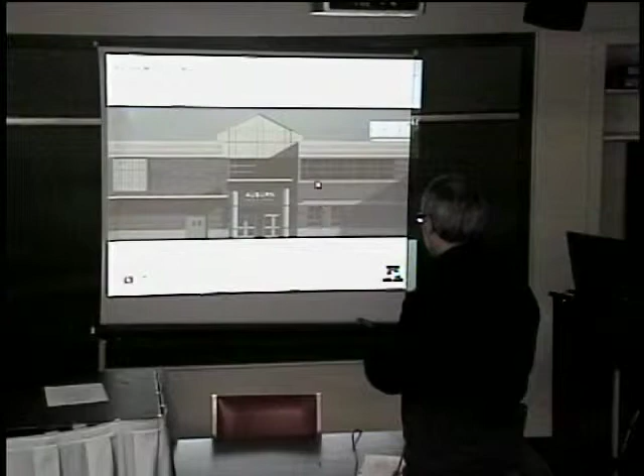The columns at the entrance will be precast concrete. The window lintels will be precast concrete, and the sills as well. And there's also some banding that runs around the building. So that's what we're looking at for the precast.

We're looking at a red brick. If you look at it, you can see it's got some flashes to it, so it's not just one color. It's an extruded brick, a Glen-Gery product, but again there are other manufacturers—we can't just specify that one, but this is our basis of design.

So that's your basic field brick. You can see here there's some darker lines that run around and pick up on the window mullions and other features. That's an accent brick, and it's an Endicott brick. It's got a nice finish—smooth, with a little bit of flash to it, so it sets off nicely with this. And then a colored mortar.

At the entrance, at each entrance canopy, we've got a band that runs across it and sets off the letters of the building, and that would be an aluminum composite material. This is the color we've selected, so we can actually put this color into the specifications, and there are other manufacturers who can match that color. So again, that's our basis of design.

We're looking at individual letters on the front, light colored, that will set off well against the blue background. You can also see we've got some metal paneling up at the top here at the entrance, and then running around the building there's a profiled panel. This isn't the exact panel, but it's similar. The panel we're using has this same depth and in-and-out profile, but it's also got a flat feature too. So instead of being all profiled like that, it's a profile and then flat, and that runs around the top part of the building and ties in with the roof fascia.

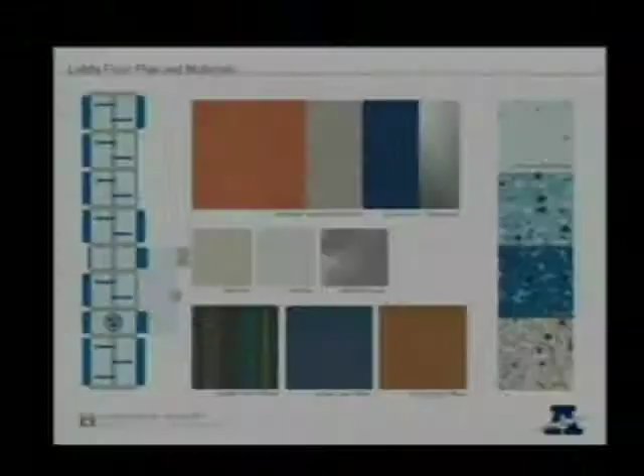At the interior of the building, we've shown you some of the lobby features, and this slide really represents the floor patterns and some of the materials.

On the left, we're proposing a pattern with Terrazzo floor tile, and that's this product you see here - different samples of Terrazzo. It comes in tile form, 12 by 12, 24 by 24, different sizes. It installs just like ceramic tile with Portland thin set mortar and has grouted joints, but it's much harder than ceramic tile and will serve very well. As you can see in the existing middle school where you have Terrazzo floors, those have lasted very well over the years.

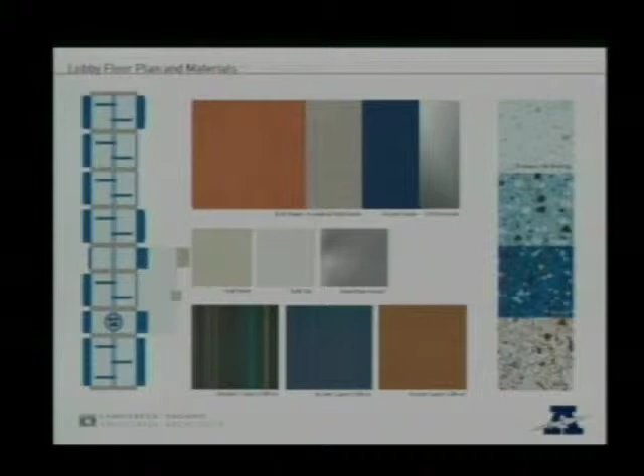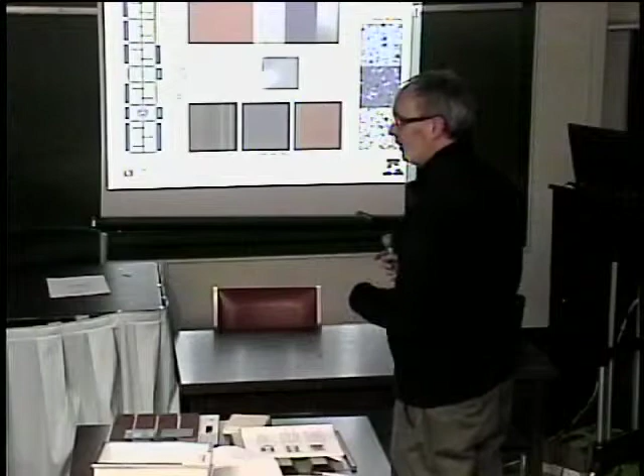We're proposing a pattern here with different colors. It ties in with the pilasters in the lobby, which I'll show you in a minute in the rendering. We've got a few different colors going, a feature down the middle, and then at the bridge, right underneath it, we'll have a water jet logo of your Auburn Rockets. That'll be right at the intersection with the corridor that goes into the classroom wing.

At the entries, at the vestibule entries, we're using a walk-off mat. This is a modular carpet tile - I think I've shown you this before - and that will also pick up on that pattern. We're actually carrying it slightly into the first bay at each end of this pattern here. So instead of being Terrazzo at this location like in this earlier version, that'll actually be this walk-off material, so that you won't need to bring in separate mats and deal with those.

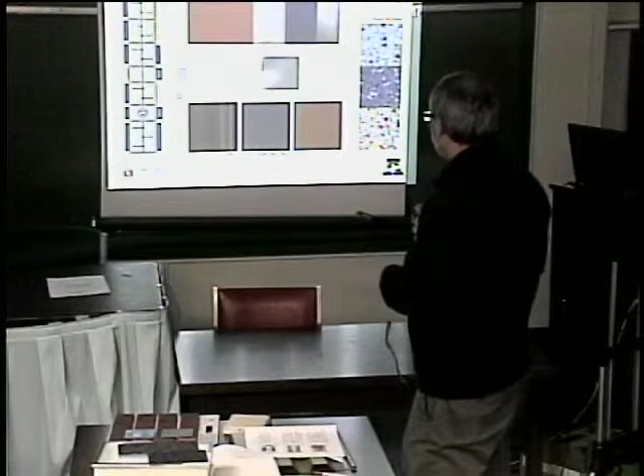We've also got some other materials here - wall panels, some acoustic materials on the walls, and the Terrazzo. These are the colors that we're looking at in general terms on the right. For the offices, we're showing some carpet that's still a work in process, so we haven't made any final decision on that yet.

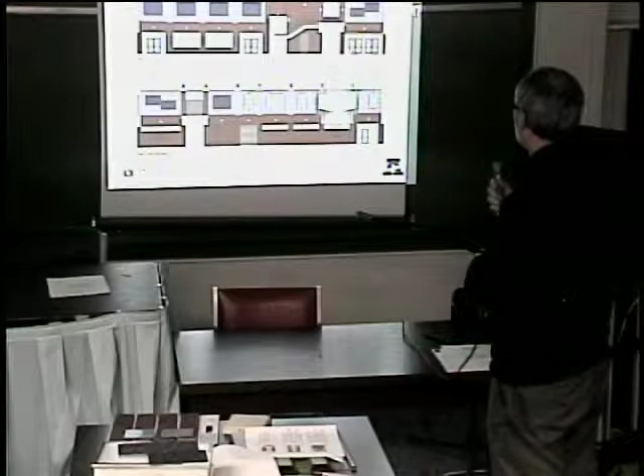You're looking at the gym here - this is the gym side, so both these doors are entrances into the gymnasium. They'll all have tempered glass all throughout. We've got two large display cases here, and the stair that leads up to the bridge and then across to the classroom wing, and the entry into the classroom system here. So we're using a plastic laminate paneling system, and that'll be broken up with reveals.

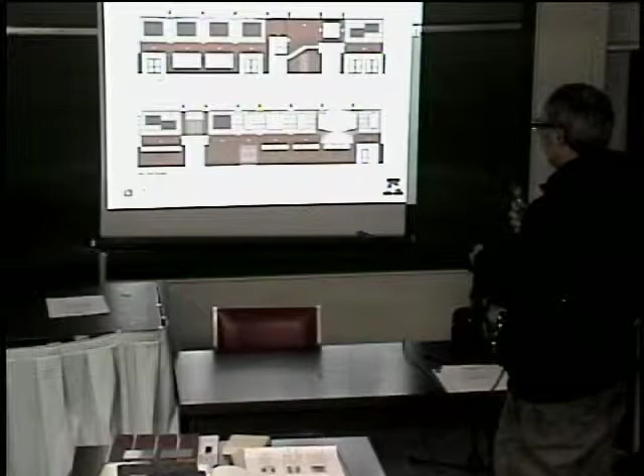Up above we have acoustical wall material, something like this. It's held in place with Z-clips and mounting clips. We're looking at a couple different materials for that - the fabric, an accent material, and then kind of a neutral material. And up above, again, we have the fiberglass translucent material for the skylight.

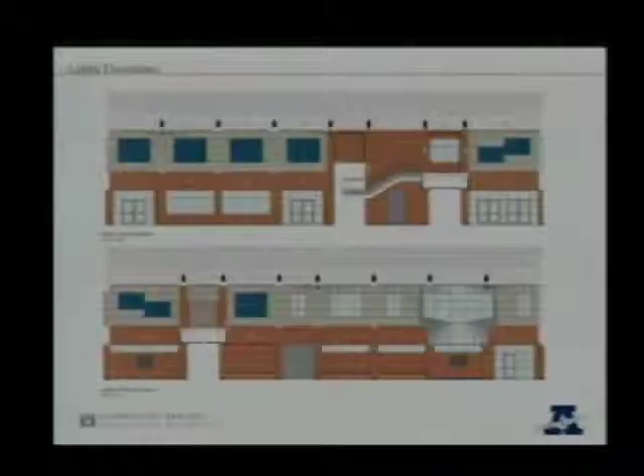We're using two different laminate panels. On this side you see the kind of wood tone color, and on the other side, where we have this rounded media center bay that projects out, that's more of a metallic finish plastic laminate paneling, and that will also be used on the sides of the bridge and around the stairs as it goes down to the first floor. So that'll kind of set those off.

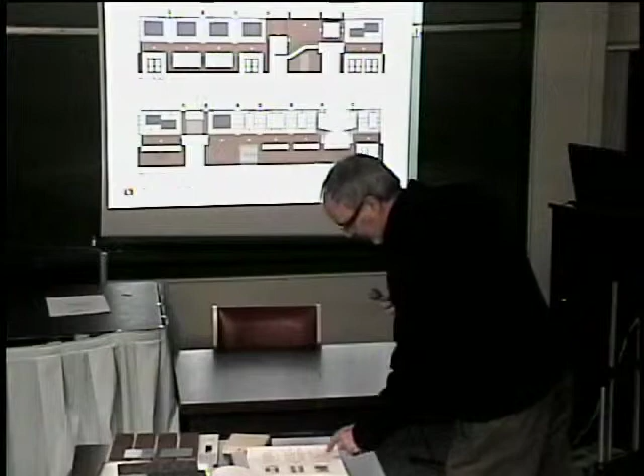Also on this elevation, you can see this opening, which is a coiling grill - it's like an open lattice grill, and behind that is a school store. That will be more or less a display area. It'll have some display slat wall on the wall, so they can display clothes or articles for sale.

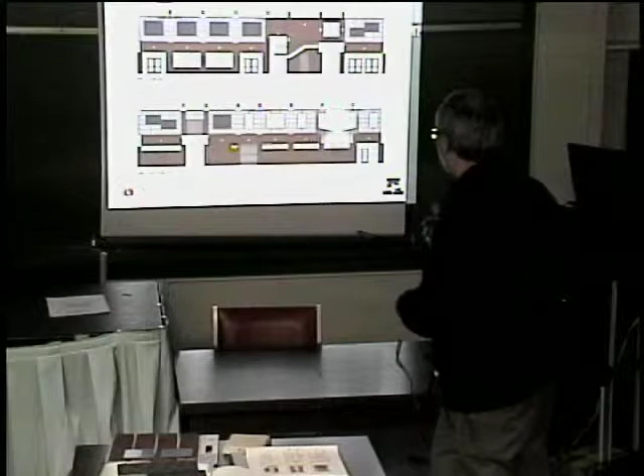You can also see there's some high windows along here, which are into offices and also into the media center up above. Just note that although they're windows, they're up above the door head height, so students walking by can't actually see into those.

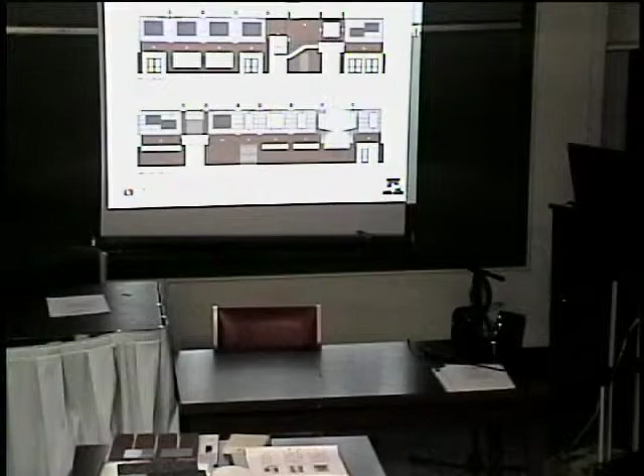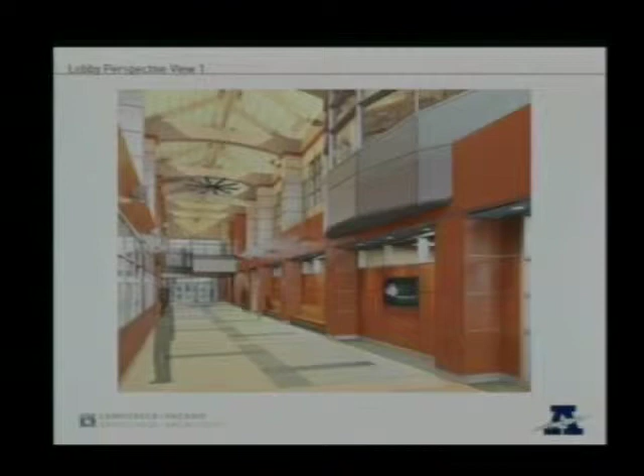And this is a view of the lobby. Again, this is the view from the main entry, and you can see the media center bay projecting out here, and you can see these crossbars. We are proposing a stratification fan here so that it moves warm air down in the wintertime. We've got uplights on top of these, and also in various places along the upper edge and this lower band here.

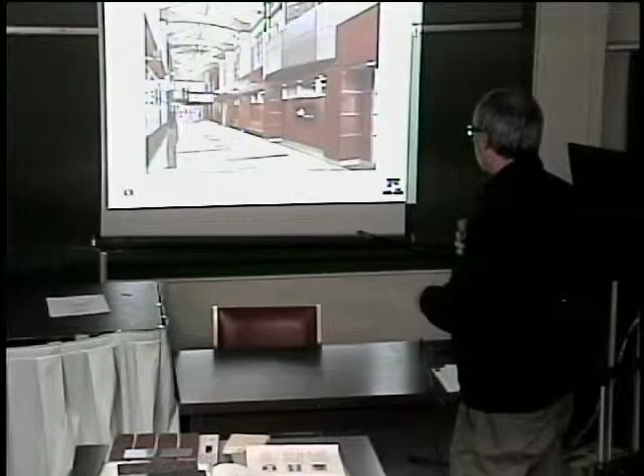And looking down, you're looking toward the multi-use field entrance here, and this would be the stair up to the bridge and across. On the left, the display cases.

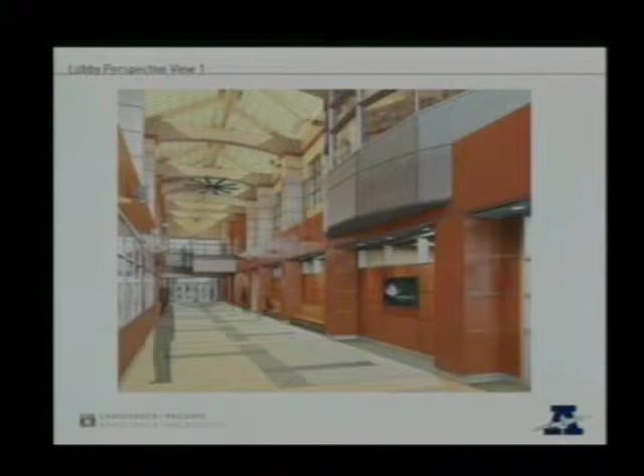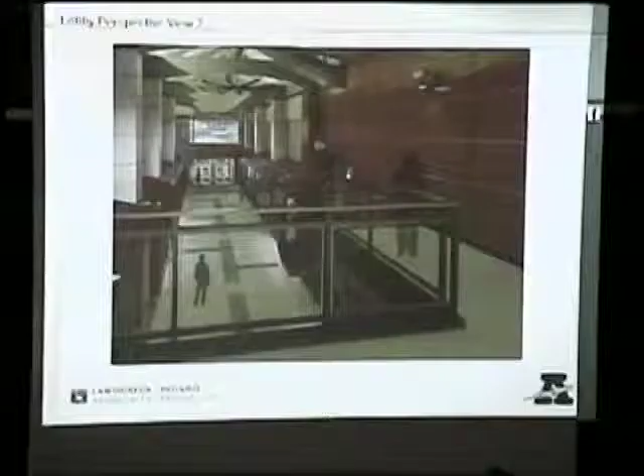From this view, looking down into the lobby from the stair. This stair is treated a little different than the others.

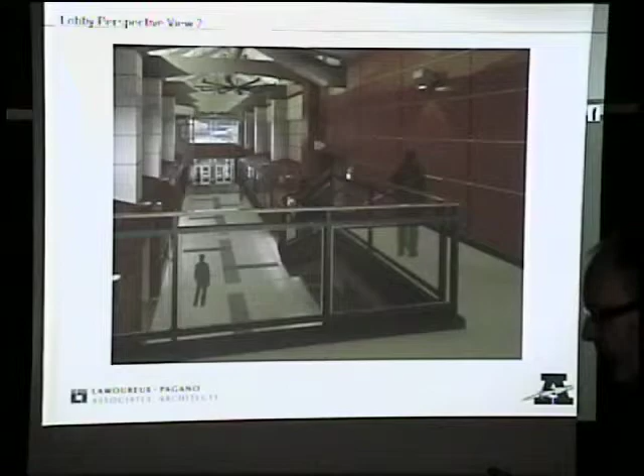We brought some samples of what we're proposing. We're actually proposing stainless steel. This is aluminum, but the size, shape, and format is similar. These are the post brackets.

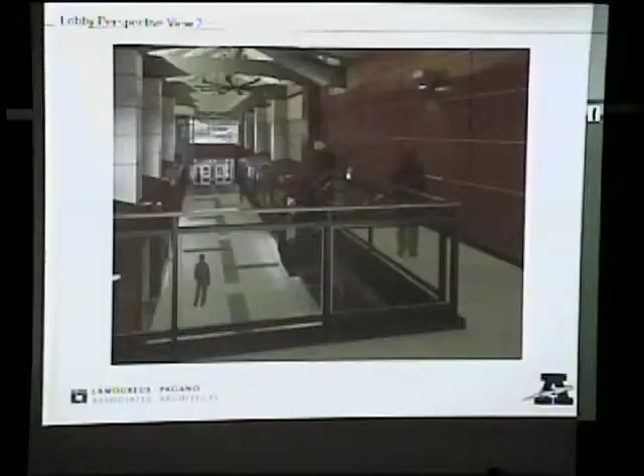The handrails will all be welded and ground smooth. Along the top of the guardrail, which usually takes a beating, we're proposing a stainless cap along that guardrail, so that will protect it.

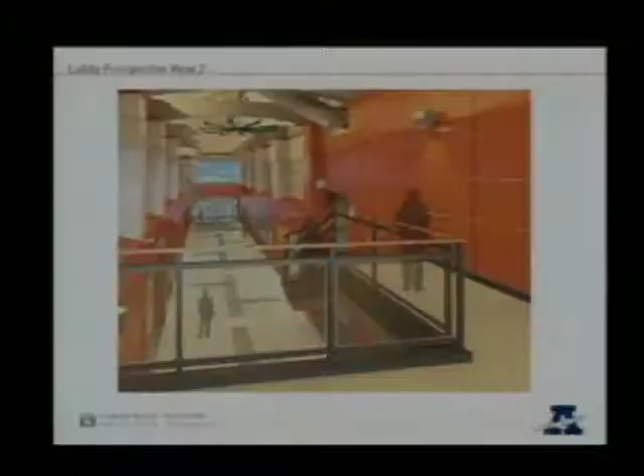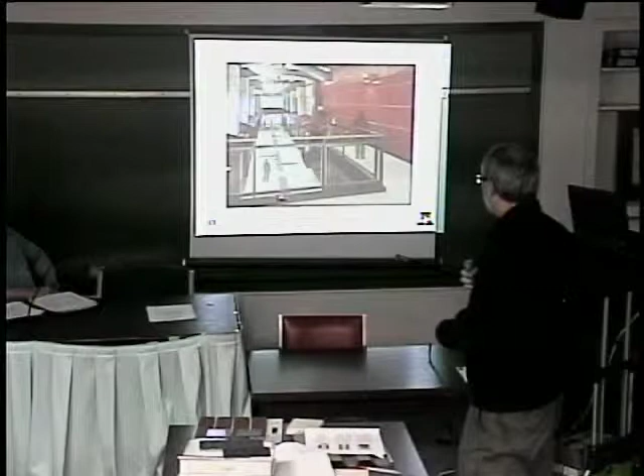At this one stair, we're using a stainless steel mesh that can curve in one direction, so as it goes around this corner of the landing, it curves smoothly around. This will be held in place in floating frames within the guardrails.

Moving along into the gymnasium.

Again, we're proposing a wood floor. This is an anchored channel floor, so it'll be held down and fastened down, but it will have resiliency. There'll be resilient pads, so it won't be a hard floor.

We have wall pads on the ends and the sides. The bleachers will be plastic seat bleachers, and those will be motorized. All of the equipment will be motorized.

There'll be a divider in the center of the room that goes up and down via wireless transmitter. Also, all of the basketball hoops can be operated with that same approach.

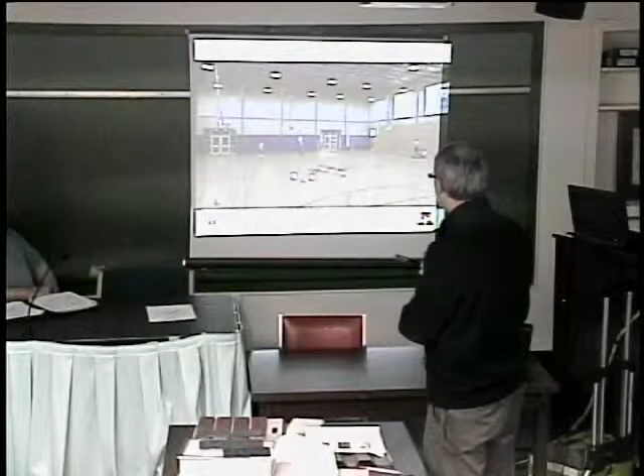We're proposing again the same Auburn Rockets logo painted in at center court, and at the ends, you can't see it here, but it will spell out Auburn Rockets with about a 2-foot wide solid band of blue at each end.

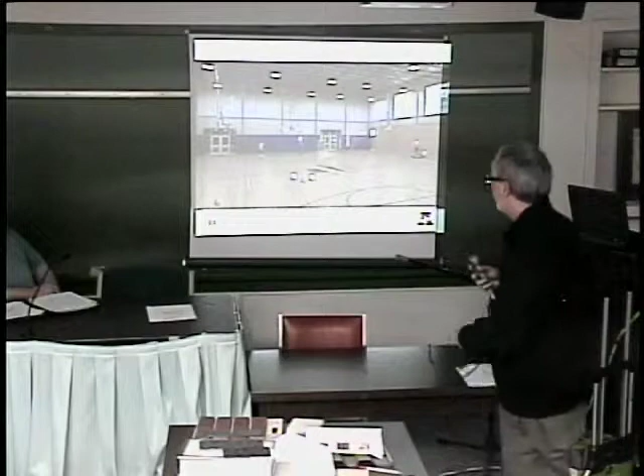Up above, the structure is exposed, the ductwork, and that'll all be painted out. We have an acoustical steel deck up there—it's perforated, it's got insulation in it, and it helps reduce the reverberation in this space, which, with all the hard surfaces, can be a pretty loud space.

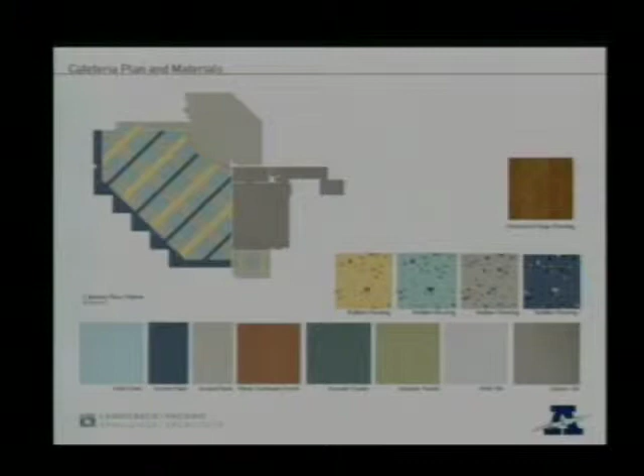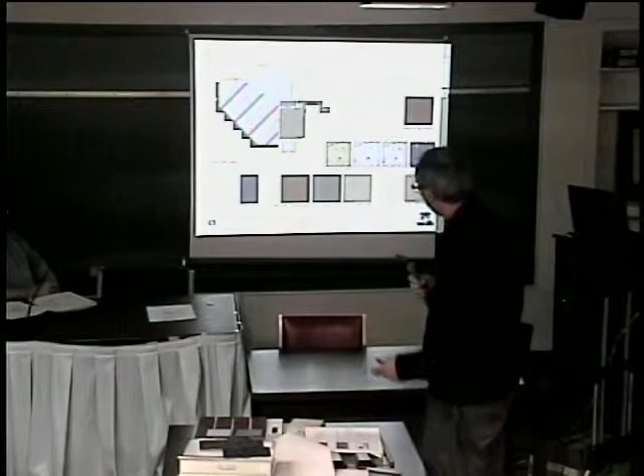The cafeteria and the media center—I'm going to go through these fairly quickly. They're still a work in progress. We've met with the committee, and based on their response to some of the initial colors, we've come back with a couple of new options for colors and pattern.

This level of drawing and pattern buys us something for the bid set. It has multiple colors and a level of complexity, and when we get to the point of actually picking colors, we'll have the ability to lay that out and show you something a little different.

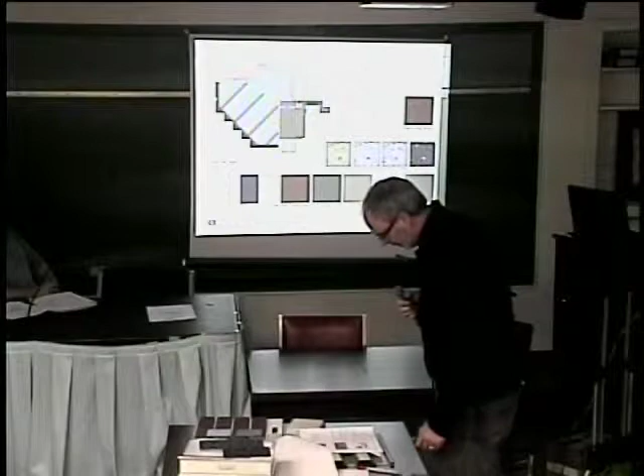But in essence, we're looking at rubber floor tiles, such as this, in fairly similar colors to the Terrazzo.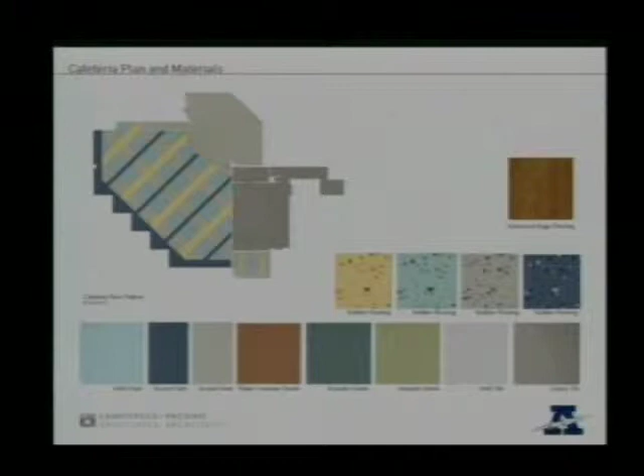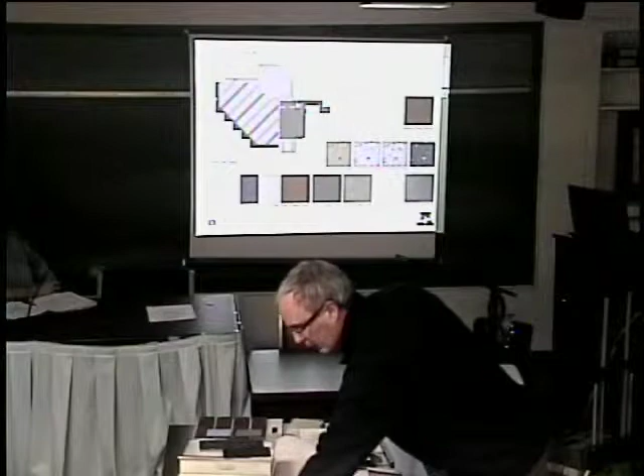The kitchen itself will be a glazed and unglazed quarry tile. We're planning to bring the plastic laminate paneling system from the lobby into that space and wrap it around.

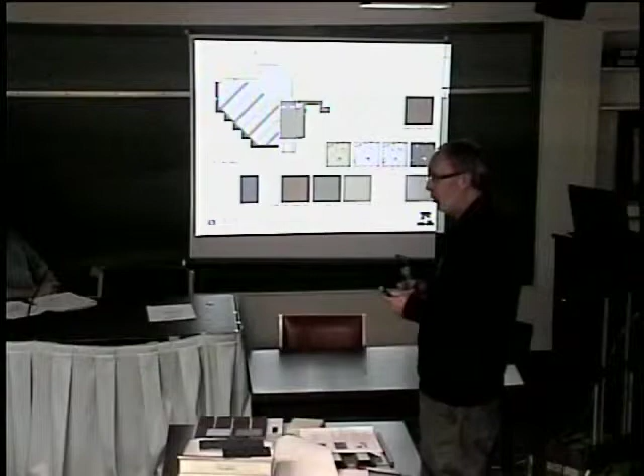And then we're looking at some wood at the stage apron. We're looking at white oak typically for the wood, with a stain.

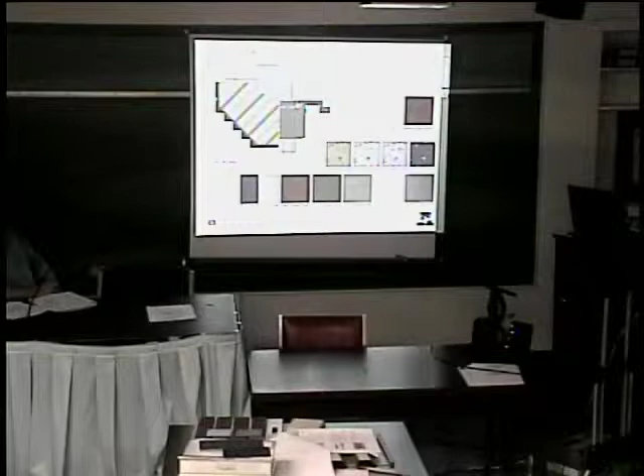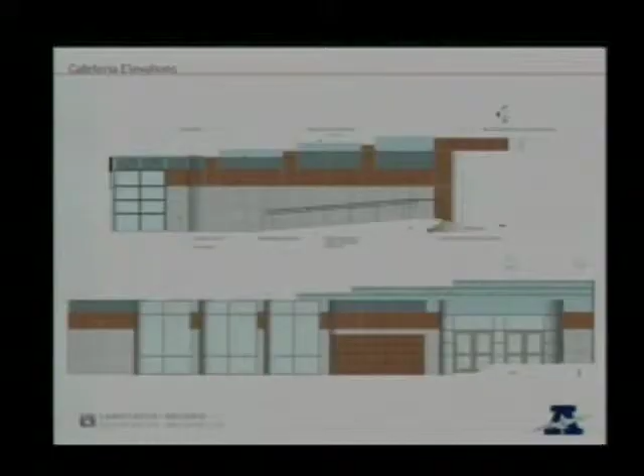On the walls, ceramic tile, and again some acoustical treatment, because this is a multi-use space—not just an easy to clean cafeteria space. It will be used for presentations, so we want to make sure it's treated acoustically well too.

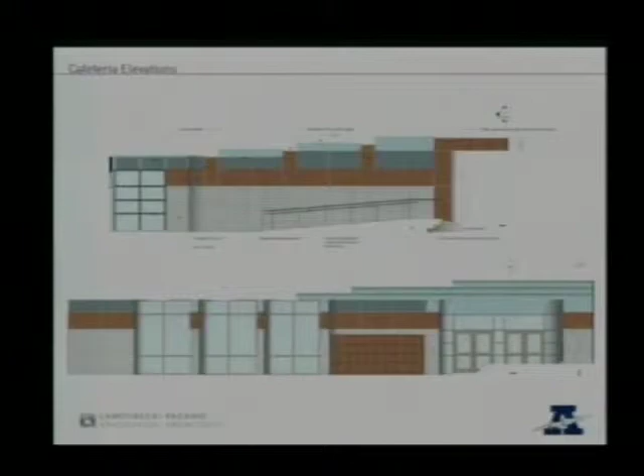With that in mind, we have some acoustical panels up high. We'll also have roller shade fabric, acoustical fabric, on the shades at the windows. It'll be a double shade system—one shade will have the light filtering aspect, but in the event of a performance, you can use the second shade, which drops down and has acoustical value.

Looking toward the stage opening, we have a ramp up on the left. It's required to be accessible from the performing area to the cafeteria, so we have that there, along with the stage risers along the front.

That'll be the white oak. Then typically during the day there'll be an operable partition that can be closed off across here, with a similar fabric to what we're using up high.

You can see the dishwashing station there. We'll have a stainless steel opening, and the ceiling is a stepped combination of gypsum board soffits and acoustical treatment.

And we've taken a little license on the lighting fixtures. They won't really be pendant mounted because kids would like to throw them, at least kids in the town I live in.

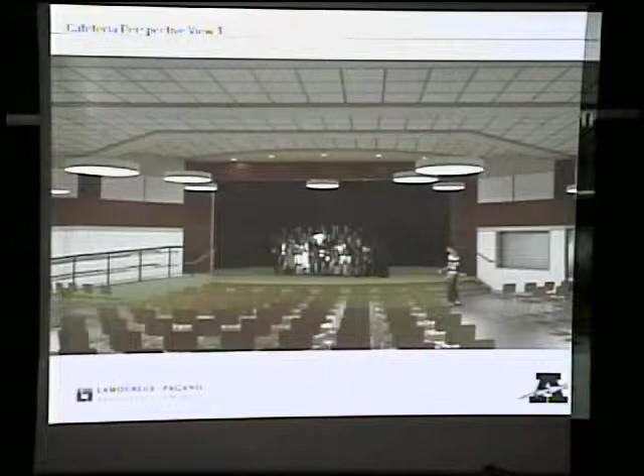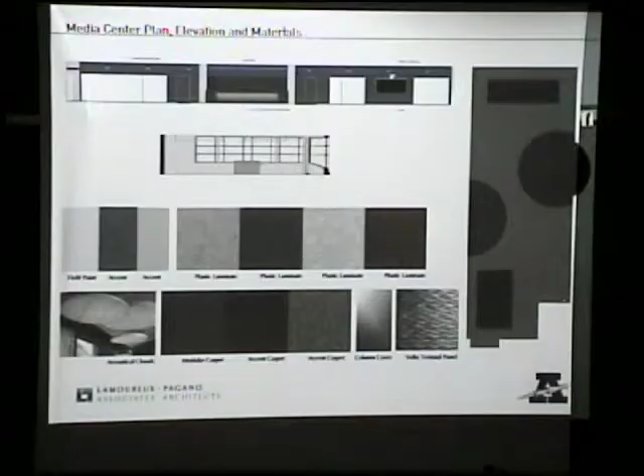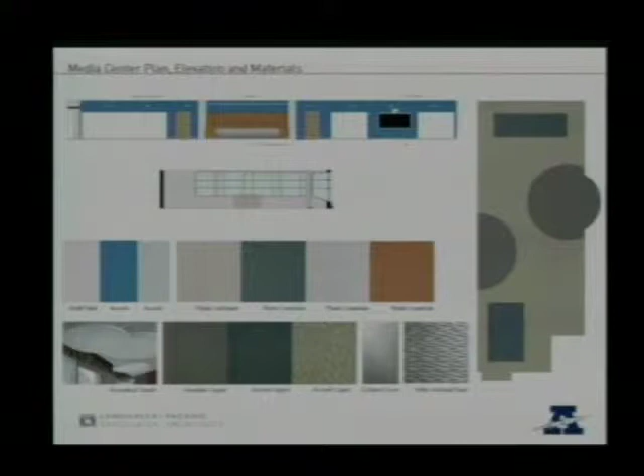At the media center, again, a work in progress. We're looking at different colors here, but essentially we're looking at carpet in the media center, and this is a circulation desk area here, kind of in this arced area. We'd do something with the carpet there to pick up on that, and also that media center bay is right here, so we'd also pick up on that.

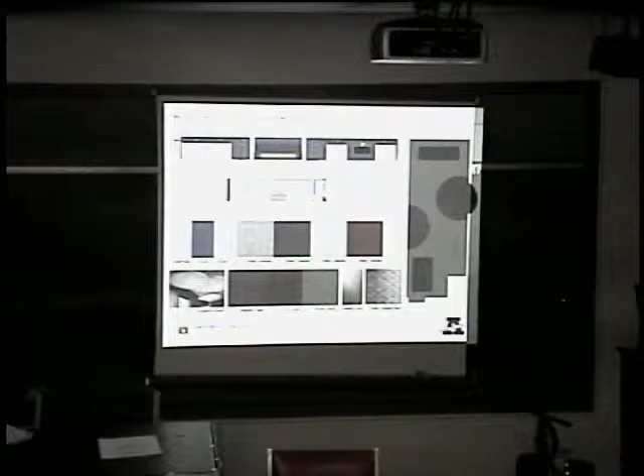And those circular elements are also picked up in the ceiling. There's suspended grids above those. We're looking at acoustical treatments along here, and also an accent wall, a painted accent wall along the back side here that would be visible from the bridge outside.

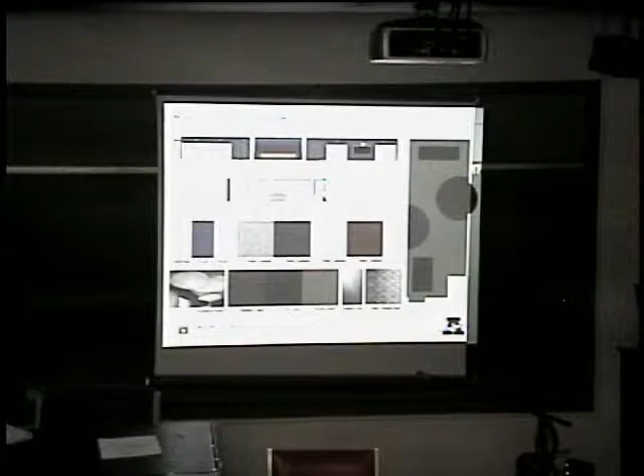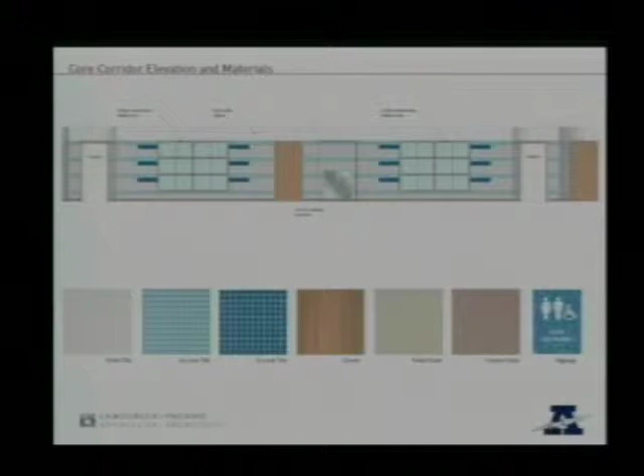And again, an alternate scheme, alternate colors. This is a core corridor where the student toilet rooms are located. We're looking at pretty much in the classroom wings up to 7 feet.

We're looking at ceramic tile, 6 by 6 ceramic tile. This is a basic glazed and matte wall. Ceramic tile, pretty standard, and then some accents, and those would be either some sort of glass tile for the accents. You can see we've got a few bands here going on, and those pick up again on the horizontals in these display cases on either side of the toilet rooms.

And we would look at carrying those into the toilet rooms. The toilet rooms themselves still have automatic sensor faucets and electric hand dryers, so they would reduce the paper waste.

In our typical classroom, we've got 3 more or less similar or identical classroom corridors, and each of those has two teams, but we want to treat each one a little bit different in terms of color.

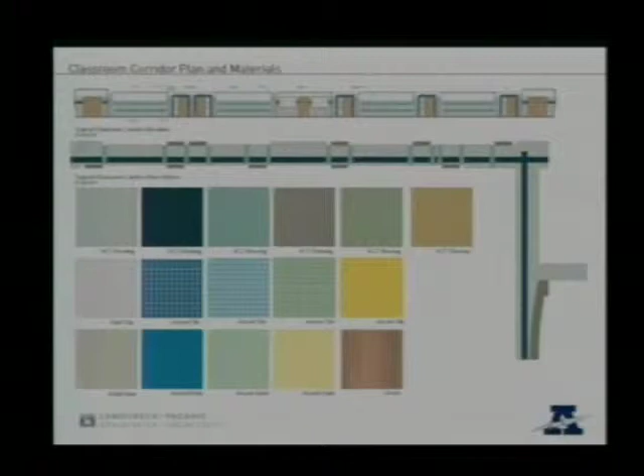So what we're proposing is to carry a common theme through in terms of pattern, and that would be this. We would bring a common stripe through, so the field colors would be the same. This blue stripe through would be the same.

And the entrances to each classroom would be the same, and then on top of that there would be a cross stripe, if you will, that would be lined up with the pilasters. So we have these pilasters that identify the classroom entrances, and those would reflect the pilasters.

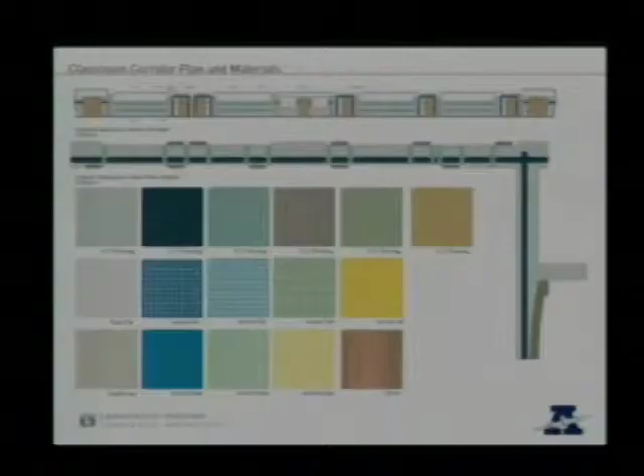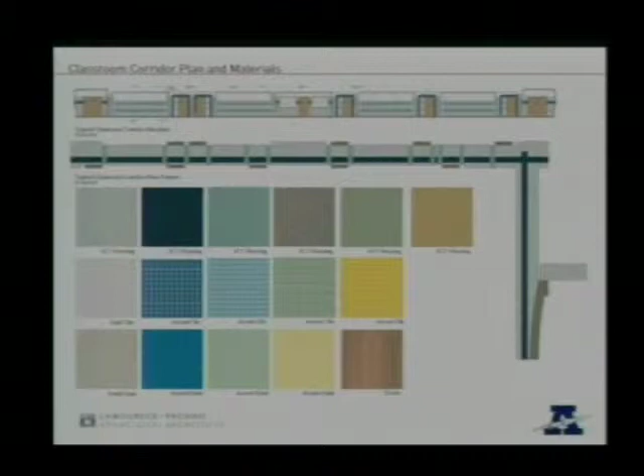And then inset into each classroom entrance, you can see some accent colors here around the doors and side lights. Those would be the glass tiles. So as you're walking down the corridor, the typical walls and the lockers and things in general would be kind of a neutral color, and then the emphasis would be on the classroom entries.

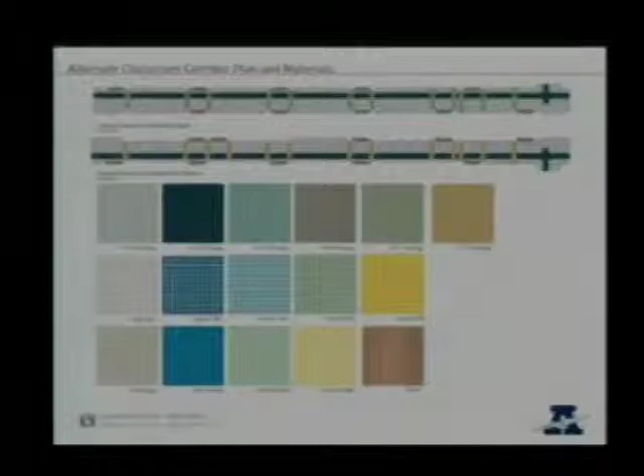And the whiteboard would be used both as a markable surface and also as a projection surface for the interactive projectors, which are mounted on the wall.